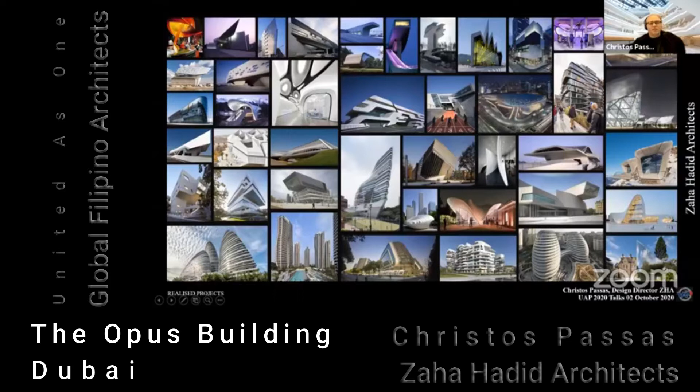As you can see, each one of them is kind of a unique architectural expression. The Business Bay with the creek basically allows all of these buildings to have a good kind of community of buildings around the water. And this is the site of the Opus, in close proximity to the number one landmark in Dubai. Essentially the city of Dubai decided to allow for ample space around the Opus, and that gives it also a certain privileged position within the urban fabric of Dubai.

So when we first started, this relationship between the Burj Khalifa, the extended place, the extended urban fabric of the city, necessitated a project that we thought should be unique. If you look at some of the buildings next to it, they are still characterized by this initial master plan developed for the Business Bay, where each one of the buildings for these lots was meant to have a parking podium on the base, and then have a tower or two towers sitting on that podium.

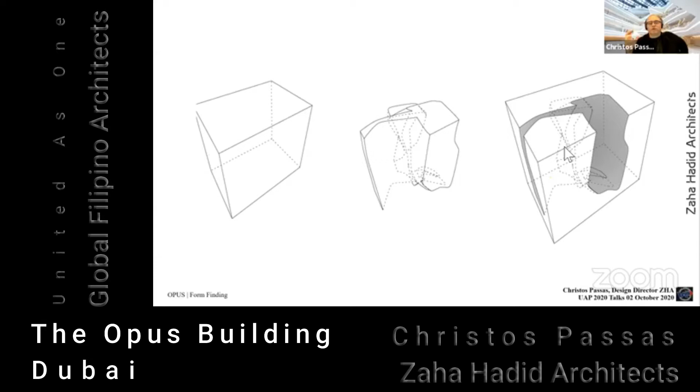What we feel this project does is use its own form to create self-shading, which is important for Dubai. In retrospect, having been with this project for almost 15 years, I see it also as a kind of prototype of three-dimensional urbanism.

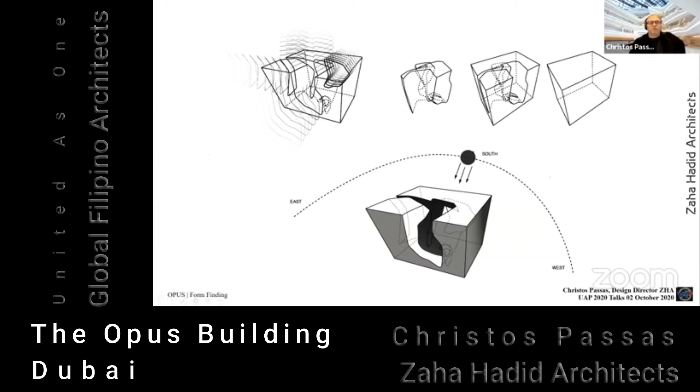This bridge connects the view between the two sides of the building, giving us the opportunity to think of it as a sectional loop that allows movement of people inside, using the building as a continuum instead of a dead-end structure like a tower.

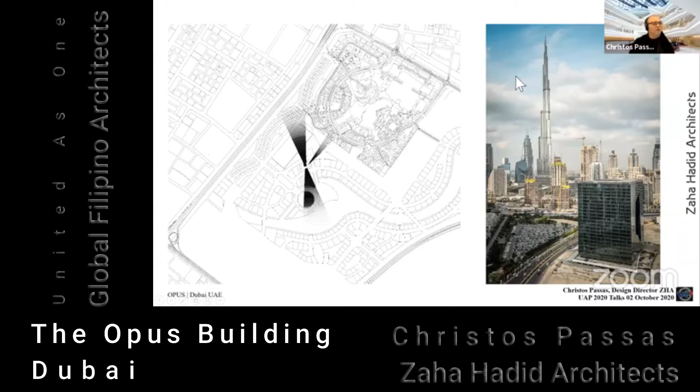The placement of the void allows us to see north and south, through to the desert on the south side and the sea on the north side, and with windows on the side to take in views toward the Burj Khalifa, so we could enjoy spectacular views toward that incredible monument.

Another aspect of the design of the Opus is its facade. Besides the void and solid contrast, which was a very interesting instrument for us to give sculptural form to what is otherwise a simpler volume, there was also the treatment of the facade.

From very early on, we experimented with ideas of facade as effect, but also facade as a veil and a reflective element that would increase the solar insulation of the building from solar radiation, and to an extent enable this building to have a kind of all-glass facade.

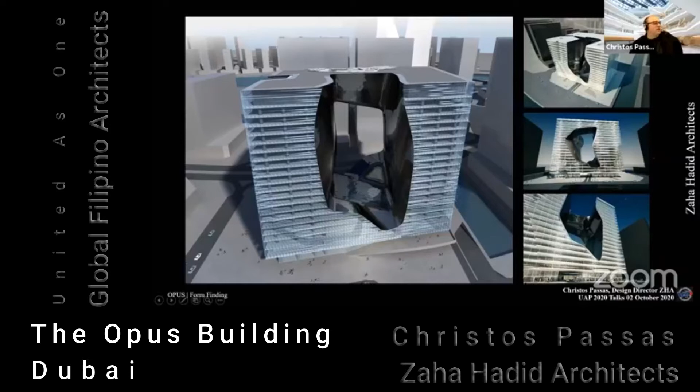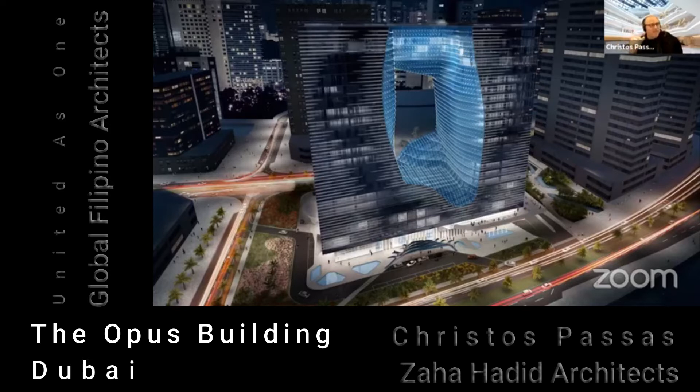This was one of the first almost final views of the project, showing the difference of the volume between day and night, how the void comes alive during nighttime, becoming an element of light and visibility, versus daytime where the volume is much more visible as a solid form.

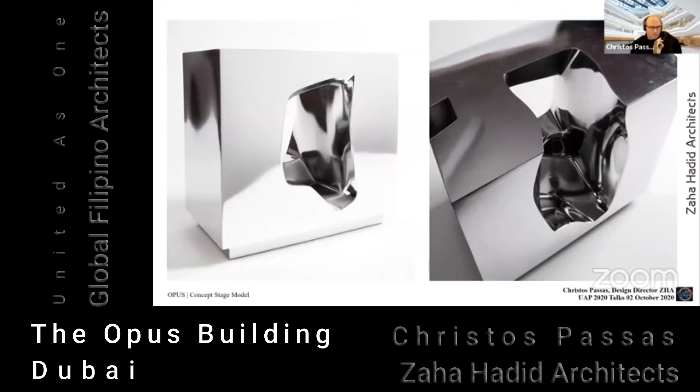I think that relationship between void and solid, day and night, is a theme we've played on quite a lot. Within that, the idea of highly defined geometrical edges holding the project together gives it extra meaningfulness and significance. These are some test models we did once the concept was finished.

They show the cube as a chromed object with a series of self-reflections appearing onto its void, which is also important when we speak about how the facade was developed.

This is another model showing the structure, the floor layout, how the building is internally organized and proposed. We're speaking about a kind of domino system, except at the edges, where the point of incidence with the internal void becomes a point of interest, and all the columns begin to bend, and the slabs take curvilinear form out of the shape of the void.

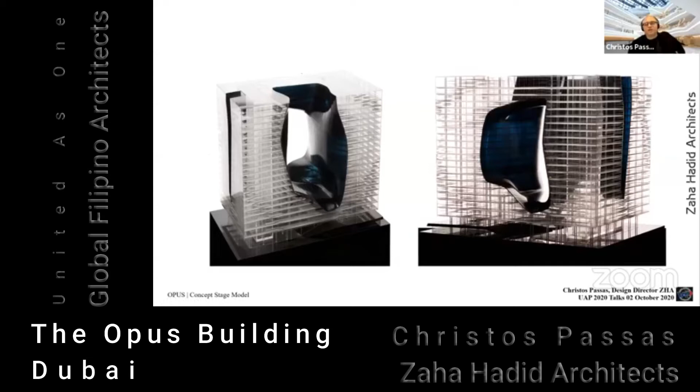That is to say, from an architectural or tectonic point of view, the void is a matter of design, both in rationalizing the facade and the interior spaces, and in thinking about how the whole building is developed.

Originally we started with the Opus as a building with a retail zone on the ground floor, which was important for the client. This is the roofless plan of the two ground levels hosting shops and other public facilities, important because it would reinvigorate the idea of the sidewalk and make the building approachable, rather than unapproachable due to the parking lots in the podium I mentioned earlier.

Above the podium levels, shown here in yellow, are the floors where the offices are developed, and at the very top we had penthouses. Later, during development, the client decided to transform the ground level into a hotel function, which was equally interesting for its public urban space outlook, and transform the penthouses into a series of service apartments at the very top.

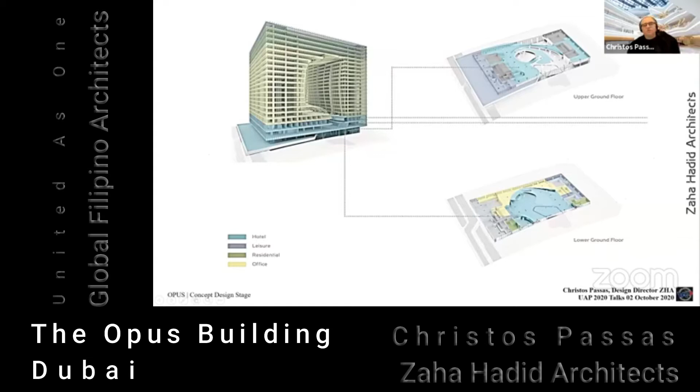So we went through the building volume at that point, and we looked at how this three-dimensional building structure, or this three-dimensional urbanism—the office zones, the hotel zones, the apartment zones—are all becoming one mechanism that allows this building to tick-tock during the day.

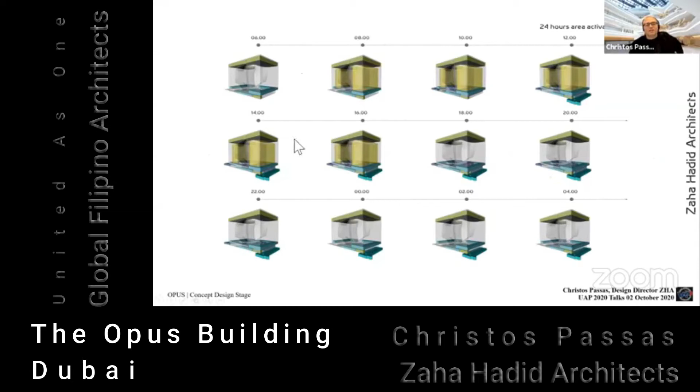Looking at it more carefully—this is an instrument we usually use to understand the buildings we design better—was also how the building functions over a 24-hour cycle. We do this with our master plans, but also with our buildings now, to understand how the flow of people through the building changes, and what areas become more or less active during particular hours of the day.

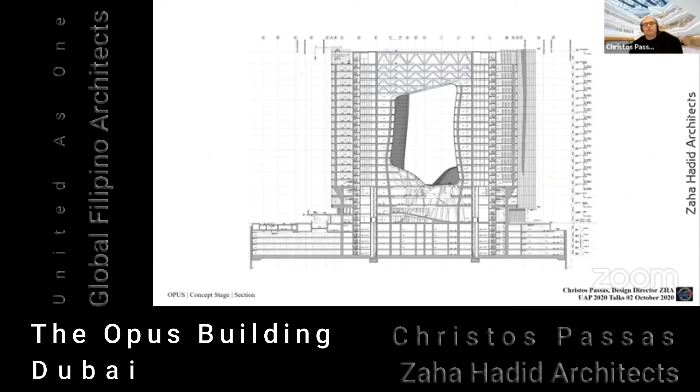The two towers are connected by a bridge. This is a living bridge, meaning it's occupied with apartments, so those apartments have views on either side of the bridge looking up. The overall outlook of this building obviously looks something like this.

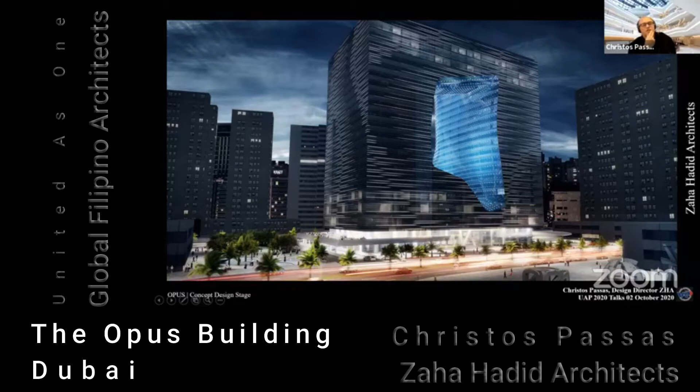The entrances—we've done a lot of designs for this project along its 12-year development, testing different ideas. In this particular case, you can see a very thin metallic mesh structure painted black, almost like a series of palm leaves overarching onto each other, creating shade on the ground for the hotel drop-off area, while being thin enough not to absorb a lot of heat from the sun in Dubai.

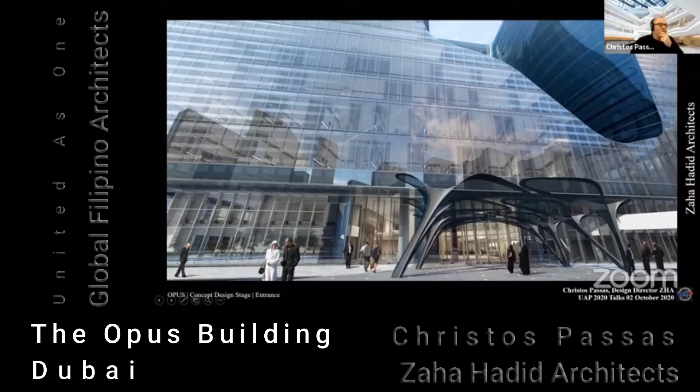So it was also a way to make sure we developed a component that would be easily cooled down and not absorb a lot of heat or energy from the sun. And of course, looking into how entering this building works under this big void, that brings me to the idea of the facade—the fritted facade.

A facade which I almost talk about as if it's a sort of artwork on this building. We first started with very timid drawings of how to proliferate a series of dots and find a way to fade them, so we could create variation and diversity in how the facade could work. But of course, making an artwork on a whole building is not an easy exercise.

There's a lot of logistics—the printing of the facade, especially when we were designing this about a decade ago—and also how to create stencils in a way that allows for a certain amount of repetition in the imprinting of these ceramic reflectors onto the facade.

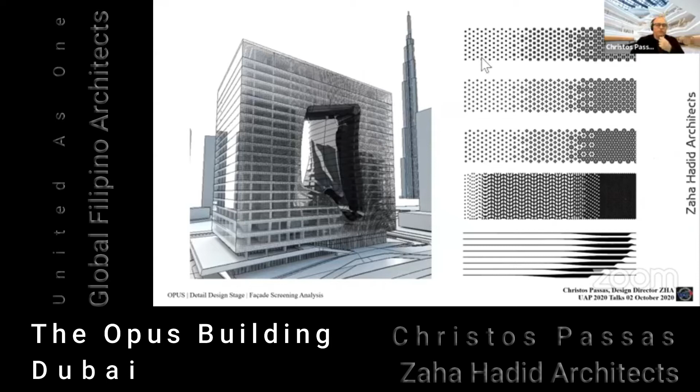Taking you back to the beginning, this was the original drawing we developed. This beautiful drawing, where you see all the lines and movement and interruptions, allowed us to look at the void almost like a kind of black hole that absorbs these lines going into it. So it's a kind of astronomical approach, but it also appears almost like a weather map.

These lines are constantly flowing and moving around, creating a consistency that we later came to call parametric smoothness, while also having points of intensity, points of sudden rupture, and in a way, transition from one side to the other. You can see these lines both for their smoothness and for their transitions.

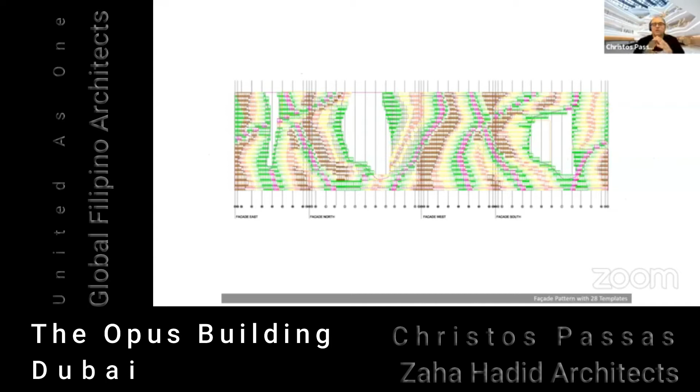And of course, in rationalizing and digitizing this painting of sorts, this artwork, we also came to this conclusion: this is an unfolding of the facade of the four sides of the cube. Remember what I was telling you earlier about the rationalization of those fritting patterns? Well, actually, this is a digital drawing that sits behind, describing every color and the kind of stencil we use to produce this unique artwork. We developed 28 stencils, 28 unique prints that we mixed, matched, and composed onto this facade to develop this effect.

Now, I'm talking a lot about this, and one would ask, why go through all that hassle? There is one important point in the opus one should not overlook. You can see here, this is Fivos and this is Vincent Novak, our project architect when we were designing this building. That image shows a mock-up of the glass when we first went to the factory that was producing the design we wanted, and you can see how you can see both of them onto that glass screen at the same time.

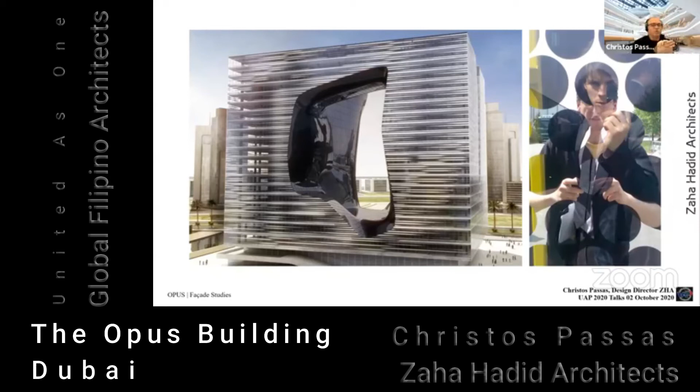What this suggests is that the Opus has a facade that plays the game between reflection and transparency, and it does that at the same time. So the Opus, as you'll see in some later images, has this interesting ability to reflect the surrounding environment, but at the same time allow you to see within it. So it's neither a pure mirror nor a piece of clear glass, it sits in that in-between zone. We found that very fascinating as a scheme, and that's why we proposed it. The client liked it, and I think it does a lot with the building.

One thing it does is it changes every time the sky changes, going from very dark and gloomy to very bright and shiny. So I think it has also that kind of changing character. This is a little bit the technical solution proposed with the different types of stencils. These are all gradients going from 100% solid to 10% solid, and that way we can create lines that have that kind of fading effect onto the building.

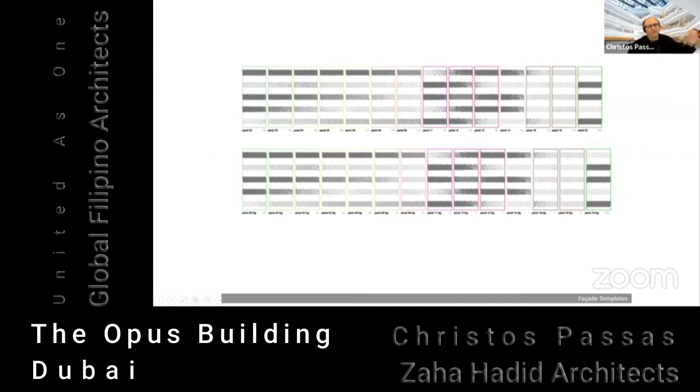Now, digital tools were not always as advanced as we have today, and the thing with digital tools is that they're always advancing. The project we've done previously to the Opus, the Phaeno Science Center, we also couldn't find perfect tools for what we wanted to do. So every project for us is a bit of an intense point of intention and tension with what's available in terms of software. But what we wanted to do here was to take the volume of the surface of the void and begin to rationalize it into a feasible, constructible, buildable proposition.

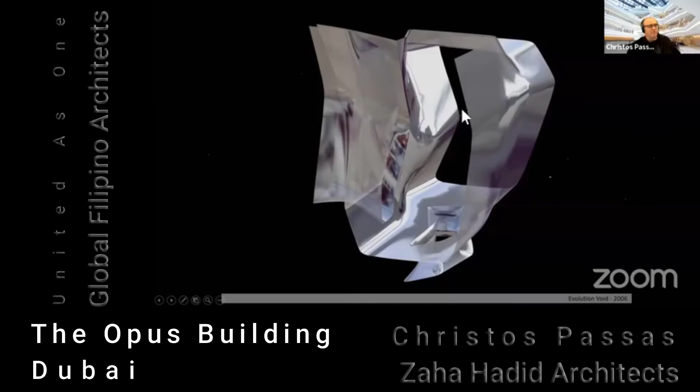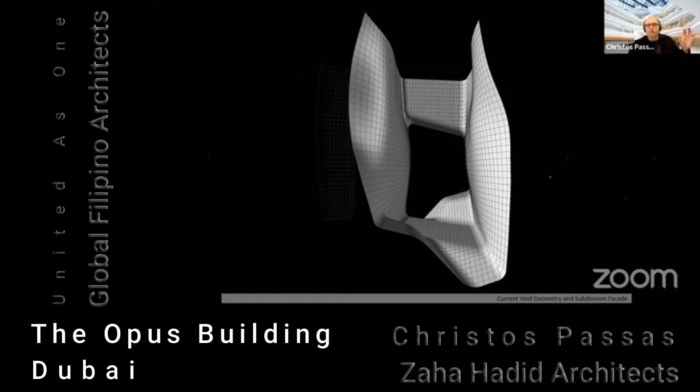These first silver drawings allow us to see two things. First, it gives us more clarity on how the surface bends, but at the same time, it gives us an opportunity to see how the reflections on this surface begin to play out, so we can have smooth reflections throughout the project. You can look at the drawing like this, the rationalized version of that void, and see the strict rationality and geometrical discipline that goes into developing an object like this. But at the same time, this will not show you the reflections, so we had to design and review both of those elements in making this facade what it is.

Speaking about the surface analysis first, we used a lot of analytical tools to create a kind of system for achieving material economy and reducing the complexity of this project. Where you see red lines, red panels, red surfaces here, this is where the panels are completely flat. The blue panels are singly curved, and the green ones, it changes, but essentially the green is where we may have double curvature in the building.

Because this is a free form, we wanted to make the statistics in such a way that the doubly curved glasses are limited to the absolute minimum, and I think we managed to get it down to 10 or 12%. We had about 20% single curved pieces that are a lot less expensive to make, and the other 65% of the facade glass was all flat glass.

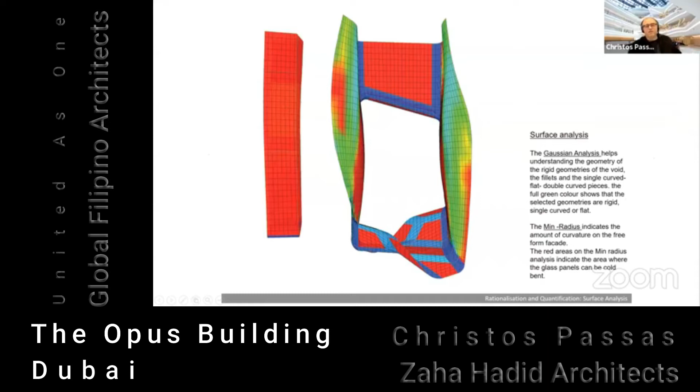This made it feasible for the client to approve it and say yes. So we went through a few cycles of these. We did the so-called Gaussian analysis so that we could test which regions needed to be designed how.

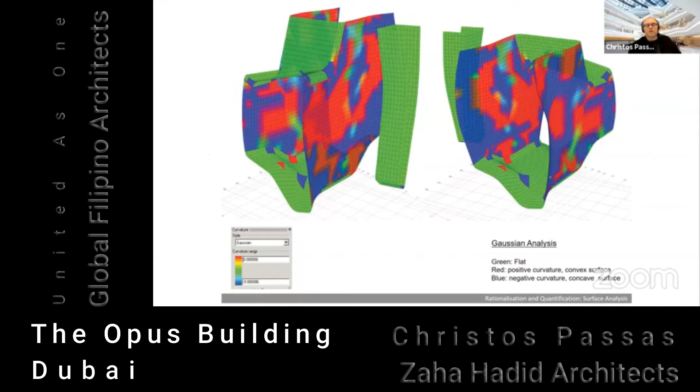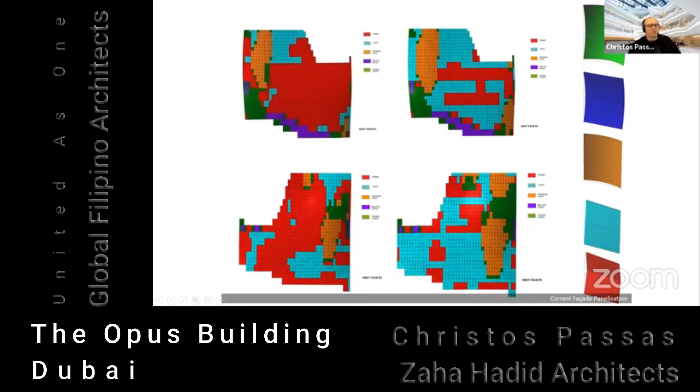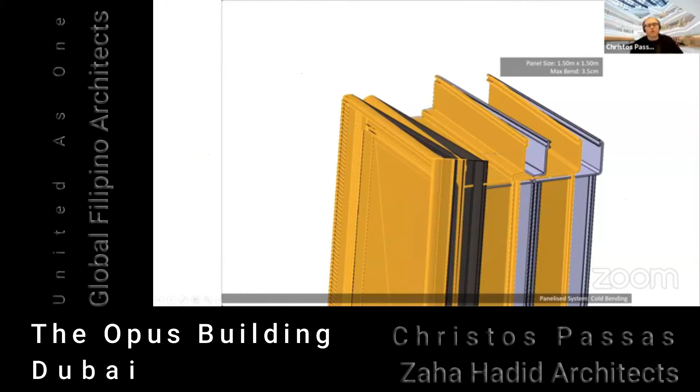But also, quite importantly, we looked at ways to facet the glass so we could get further economy without necessarily compromising the reflectivity of the facade. This is one of the ways we thought about panel size and maximum bends. Cold bending was one of the techniques we used, and it's now widely employed by contractors and architects in many buildings.

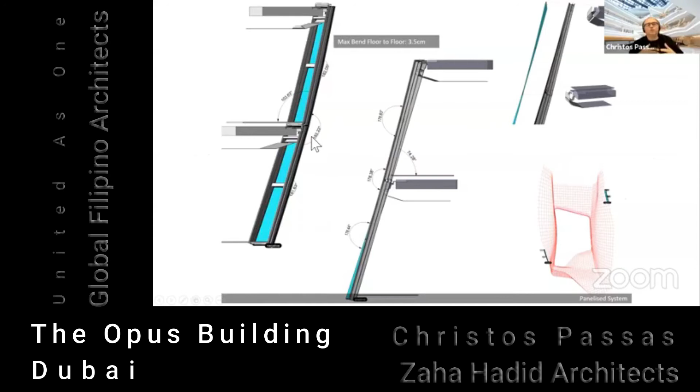But we also did another thing. In order to deal successfully with the reflection this building would produce, we did a large number of photorealistic analyses. The photorealistic analysis let us test, when we have two pieces of glass that are flat, or flat and cold bent, meaning warped, what would be the maximum angle we could break the two pieces of glass so we'd still get visually smooth reflection. The numbers shown here are the outcome of that condition, suggesting that if we break the glass up to 2 to 2.5 degrees, we'd get an overall smoothness to the object that would be almost imperceptible to the human eye. That gave us a lot of additional feasibility in the overall object.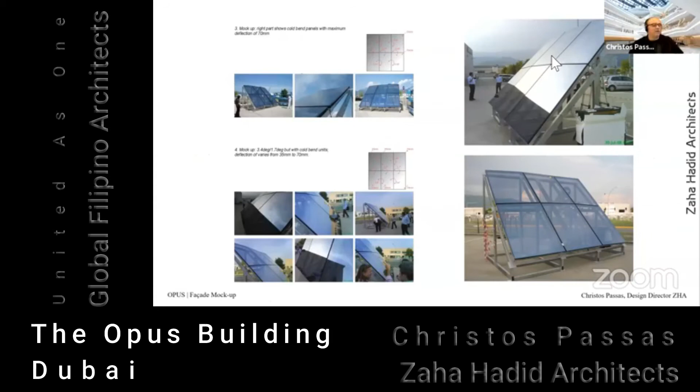Later on, when the design was almost finished, we started testing these, and in these examples, especially the two images on the right-hand side, you can see how the reflectivity of the glass plays an interesting game in shade and shadow in terms of how it reflects and becomes transparent. At the same time, the faceting of the glass comes together to create something faceted, but in the bigger view of things, becomes actually very nicely smooth. It's quite nice the way that's been done, isn't it?

So this was a lot to do with this facade story, and a lot of our time went into developing these features of the facade.

Taking you back a little bit, I wanted to speak about the concrete work as well. This is the building after the basement was finished, so here we are almost nearly at ground level. All the basement levels have been built. The building has two cores that were lifted up with moving formwork as the construction went through.

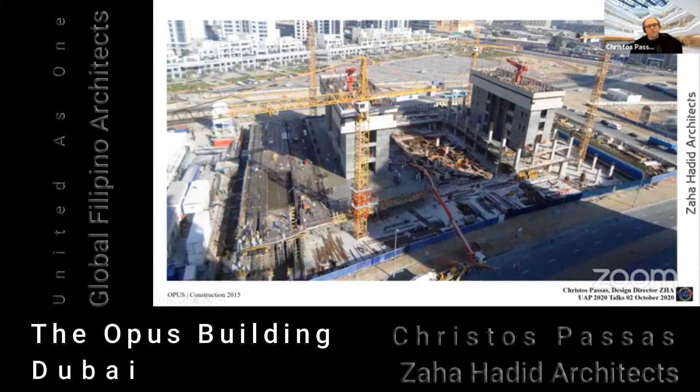Here you can see how the building looked under construction. You can recognize these V-shaped transfer zones where the external columns of the building shift and turn into the inner waist of the building, allowing the cube form to float over the ground. You can also see how the columns bend and adapt to the flexing of that facade, and how these two towers essentially came together to create that one whole that we know today as the Opus.

This is a photograph during the installation of the facade, and it makes the point of how the building reflects and makes transparent the environment that it sits in. This effect is essentially a zero-thickness effect that reflects and allows light to go through.

You can see here one more feature of the building, where all the columns were set back two meters inside the office spaces, so that the facade remains uninterrupted from bay to bay to bay. That also allowed us to optimize the visual lines from inside the building toward the outside, so whether you have cubicle offices with subdivisions or open plan offices, this architectural approach gives you much better visibility toward the outside.

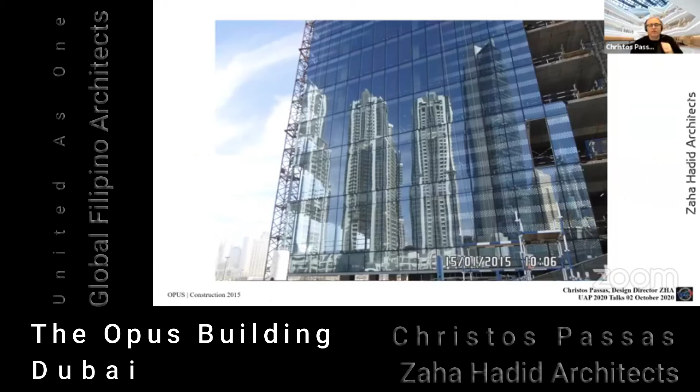Moving on, I spoke about the atrium a little bit earlier, and of course the roof of the atrium is something that also underwent quite a significant number of iterations and development.

In this case, you're seeing the trellis, the steel trellis that is basically holding this roof up. And although in Dubai it only rains once a year, if that, we still had to design a roof that would be able to deal with gushing water whenever that happens.

At the same time, one of our other concerns was that when building this trellis, we wanted to allow for maximum visibility from inside the space to the outside. So instead of making all the elements of these deformed grids into equal uniform members, we created primary and secondary members so we could increase the support span to 9 by 9 meters, and then have 9 pieces of glass with thinner profiles within it, so we have a much thinner structure and visibility through.

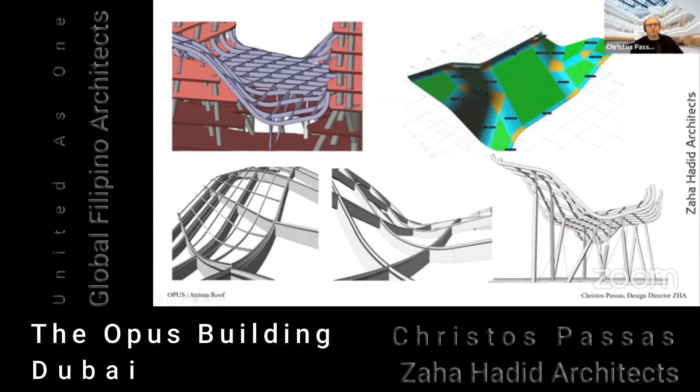Of course, a lot of digital design and fabrication went into the making of this project. Here you see images during the construction of this roof, with workers showing the size of these elements and what kind of mega structural piece of work it was to put this together.

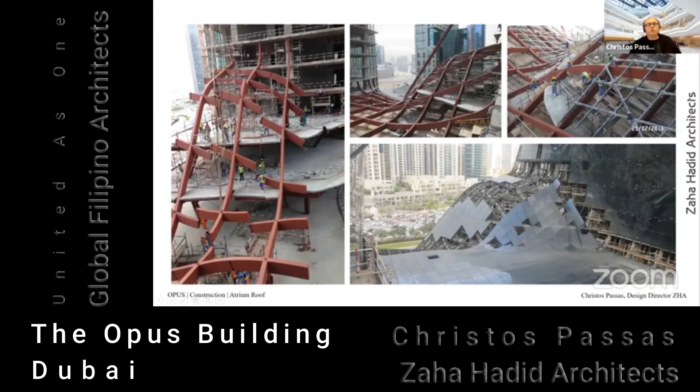But also cladding it, which was the other effect of what I spoke about, making sure we maintain maximum transparency through what is essentially the space that sits underneath this big void, which is the atrium, where during the development of the hotel we designed these balconies.

The client and operator, Meliá Hotels, is one of the most wonderful hotel brands in the world, because their hotels are always very exciting and semi-casual, and you feel free when you go to them. They have a very nice feel to them.

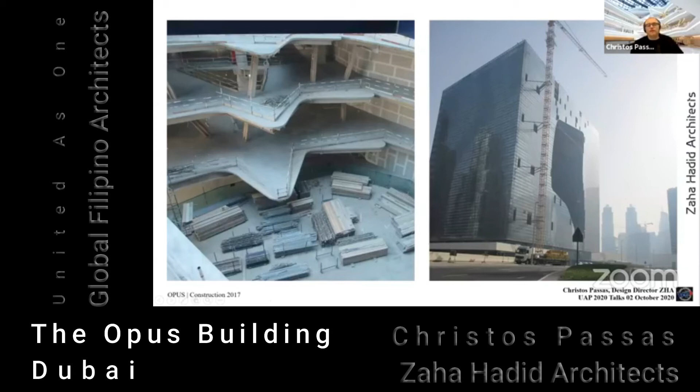So what we wanted to do for them was develop a set of balconies that would allow people to sit on these edges and overlook this big atrium space inside. And this is what the end result looks like.

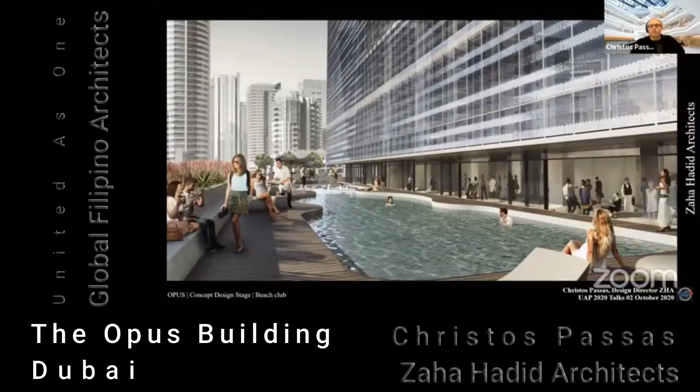Something more about the facade, but also the swimming pool of the Opus, which goes hand in hand with the hotel, of course. The corridors to the room - we go from a very wide, bright, airy and lofty space into a series of corridors that are much more dim in terms of light, with beautiful wood veneer on the walls, and bronze and pink champagne gold trimmings on the surfaces as you go into the room.

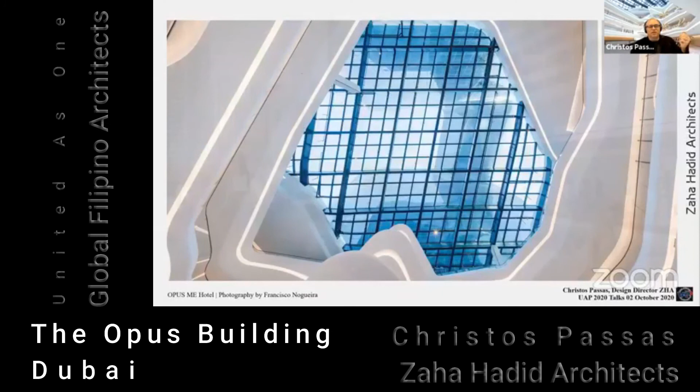And the logic here, of course, was to create a sense of hardness to softness. So it's again about that transition from one opposite to the other, where the guest moves from this kind of space, which is much more airy, wide and marble-like, into this kind of space, which is much softer, with carpet on the floor and wood veneer and so on.

So the section of the atrium in this case, so you can see the white floor overlooking into the main atrium. These decks become the reception area. Then you have a cafe, then a patisserie, and then a space for events all the way at the top, where you can also play music and invite the DJ who can stand on that balcony.

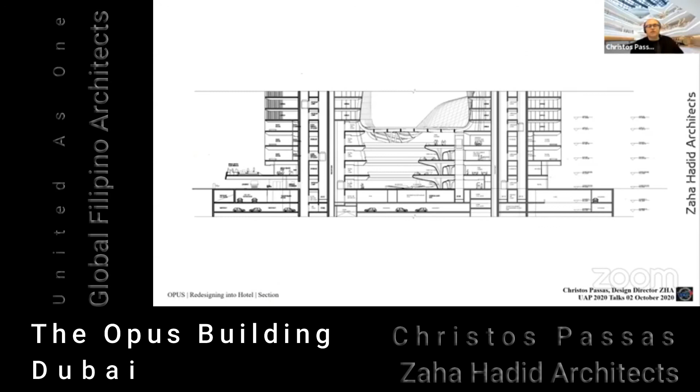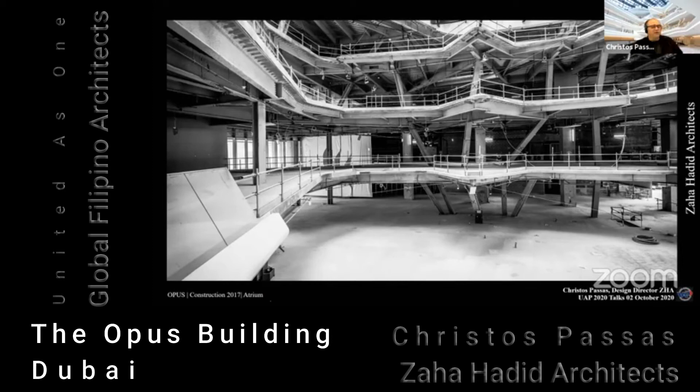So there's a series of projections into the space that allows the hotelier to use them in different ways that they may want. One of the more practical, constructive views of this space shows how it looked during construction, with a myriad of steel elements coming together to make the possibility to develop something like this.

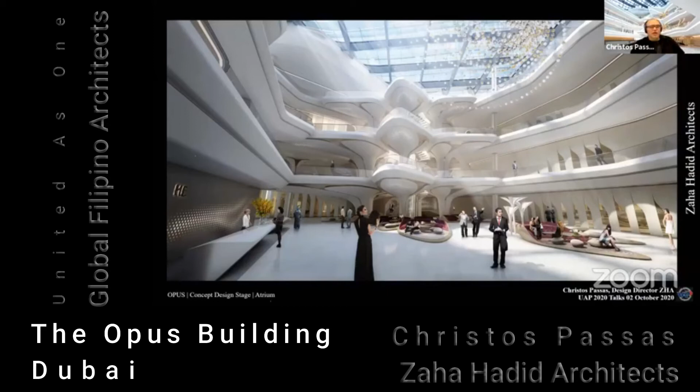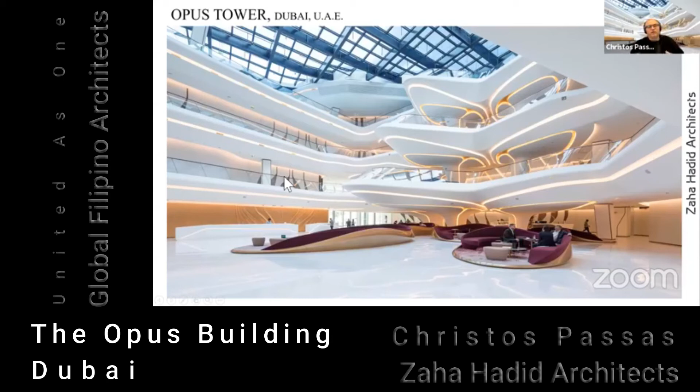This is one of our renderings. This is what we had originally proposed, and you can see here how it was developed and executed in a very nice way. You may also notice behind these white walls a series of treatments on the facade. These are bronze pieces of glass basically showing the entrances into what is essentially the restaurants, the club, and the patisserie areas of the hotel.

So the hotel lobby is basically the space that connects the two sides of the Opus. These are two main streets on the top and bottom of the site plan. Basically this lobby becomes almost like a flask that brings us in—somebody is writing on the screen—can you see my mouse when I'm pointing at this, Christian? Is that visible? Yes, it is.

Okay, so the two drop-off points—we're coming in through the reception desk, placed against the wall here. The Arabesque Lounge is in the middle; these are the columns, the footprint of the columns into the space. The lifts lead up to the hotel, then exit on this other side. The spaces adjacent to these are outlets. So essentially we have a number of outlets, for steakhouses and cocktail bars, a very nice Italian restaurant, etc., occupying the spaces, accessible both from the outside and from the inside of the space itself.

So all of these levels—in these photographs the hotel is of course empty for the photography, but you can imagine this place full of guests, and how those columns begin to define the space.

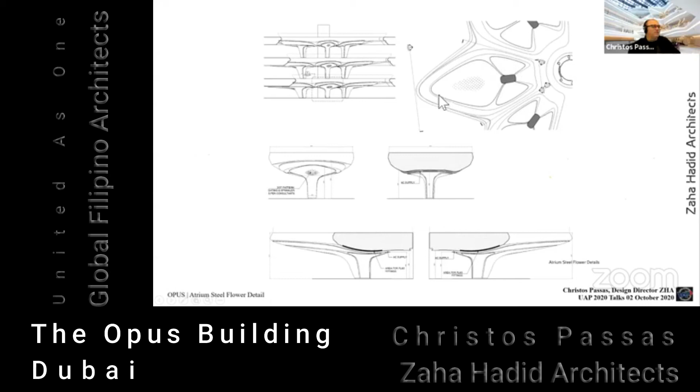I think this is also one of the aspects I wanted to speak about. We developed this design as a way to give a little bit of hue and definition in the whiteness of the form. Each one of these shadow gaps you see here essentially becomes part of the lighting lines installed in the building, and how they light up the whole building. These were developed with white LEDs, but inside each one of those coves there is hand-painted pink gold highlight, so it can treat the color and make it a little more yellowish. This is also quite visible here.

You can see this is the all-day dining opening out into the terrace and underneath the atrium. So the space we've been discussing can be used both for hotel activities—movement of people, restaurants, people sitting, dining, or speaking to each other, etc.

But at the same time, this space also forms quite a beautiful gallery that can become a cultural space. I think one of the ambitions of Mr. Amjad is to turn this into a cultural space and invite artists to make installations inside here, creating an ongoing program of events that will always give character to this space.

And of course, within it, part of the exercise we had done to reinforce this approach was to design a series of these bespoke elements. In this case, these are called the Petalinas. They're essentially sofas, but the whole furniture fit-out of the Opus is developed on the basis of these aquatic life forms, whether they are like Petalinas, or these kind of sea flowers here, all coming together into one ecosystem.

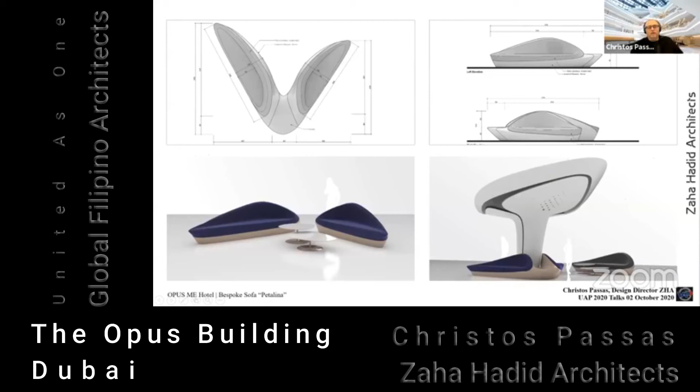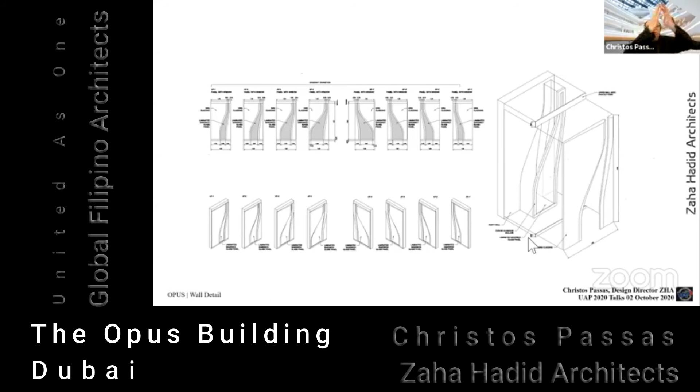On the other hand, these are the designs, the technical designs for the doors that give us orientation toward the restaurants. And of course you will see, and possibly recognize, the pointy arches. Each one of these is creating a kind of dome structure that signifies the entrances into those spaces.

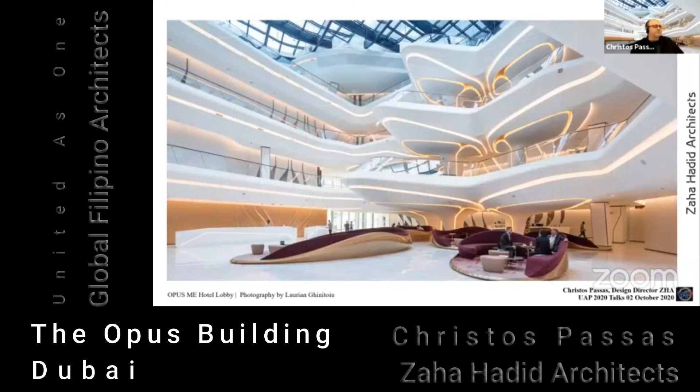So the hotel, and from here you can also see the Arabesque Lounge, where we've developed these carpeted pods where one can take their shoes off when going up on the pod and sit down. We created these as places where companies of people, groups of friends coming together to sit, or for a little informal meeting, or if you're expecting to receive someone, can have their own little pod, their own little territory, to enable people to come together rather than these big blank endless hotel lounges.

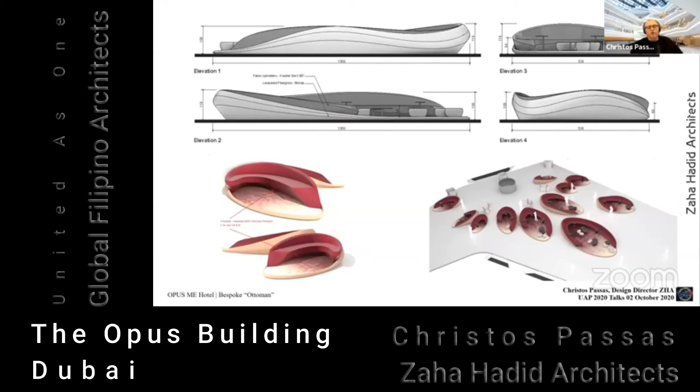So we want to create a spirit of intimacy here, so warmer colors. We wanted the staff to be easily visible and accessible, but at the same time not intimidating.

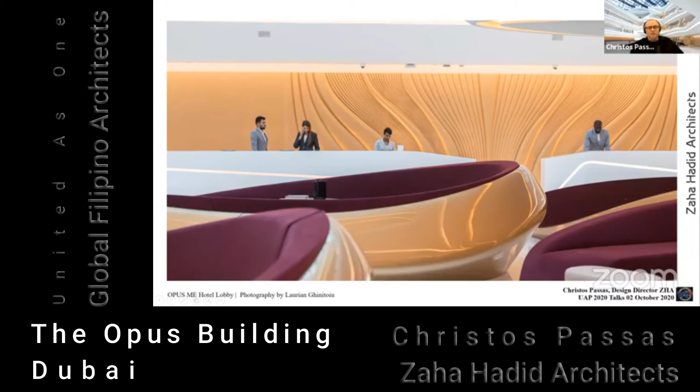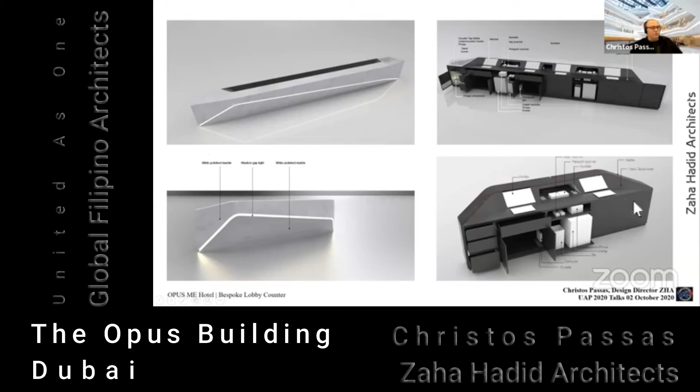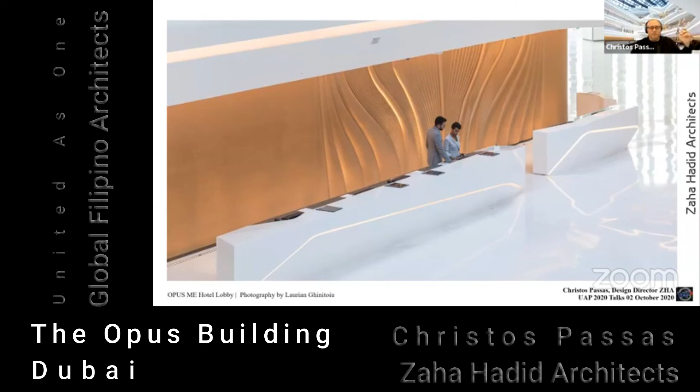We've designed the reception desks with marble, with integrated lighting inside, and integration of computer screens, touch screens and so on. We went to this extent to develop something this clean. So there's a lot of work, from highly conceptual to very detailed and articulating work, to make sure the result is nice, clean and simplified.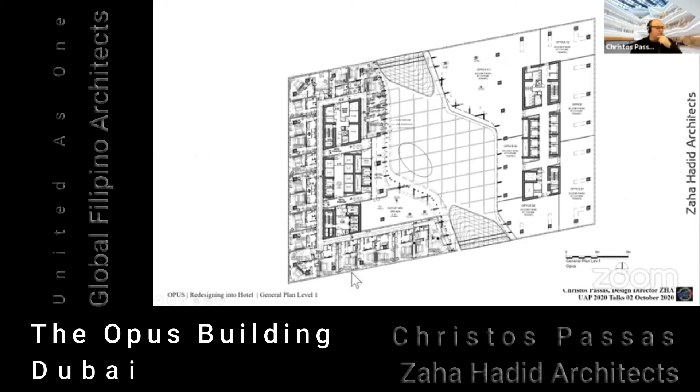Then we have suites, junior suites in the corners of the building. These designs were developed taking into account the hotel operator's brief: smaller standard rooms called auras and the vibe rooms, which are slightly larger standard rooms, and then the junior suites at the corners.

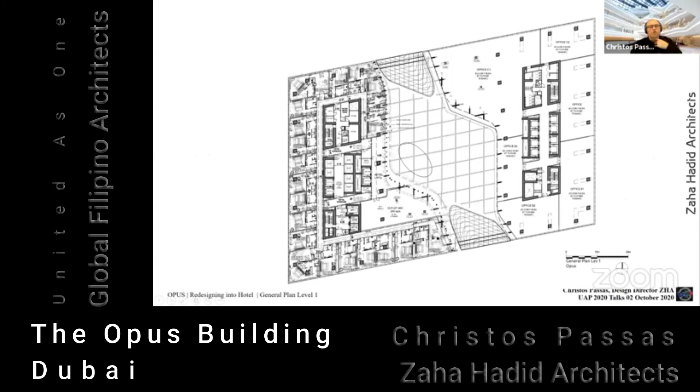So this is the vibe room, I believe, which is basically the largest of the standard rooms. Here the take we had was that we wanted to give a big, luxurious bathroom to each of these standard units. We had the so-called maxi bar and the bed that we designed. We also designed the sofa bed for the rooms, but it was later removed to allow more space in the bedroom itself.

We also developed two types of bathrooms: one in black marble, the other in white marble. We also took the initiative to contact one of our trusted suppliers, Porcelanosa, and developed together with them this bathroom range, one of our first complete series of products, where we developed the bathroom, the wash basins, the shower, the bidet, and the toilet all as one set of objects. The Opus features this product line as our first project on the market.

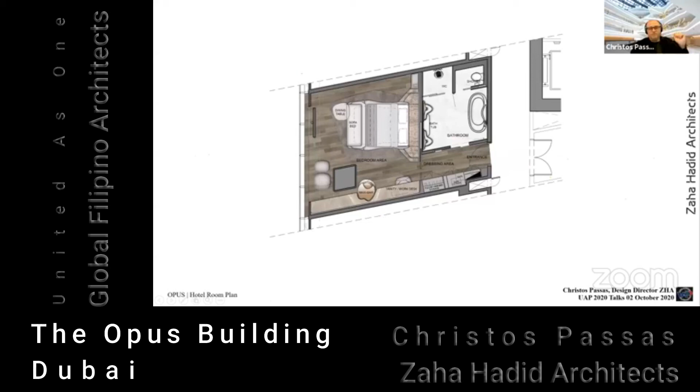So the design of the rooms is something we've taken a lot of consideration in, and we looked into different ways to organize them so they're simple and clean. We've designed the bed and also the backboard behind it, finely textured wallpaper on the wall, and marble slabs on the counters sitting over walnut effect cabinetry. The rooms were developed in two conditions.

One was the midnight desert, where we chose blue tones almost close to black, and also slightly beige tones to show the locale.

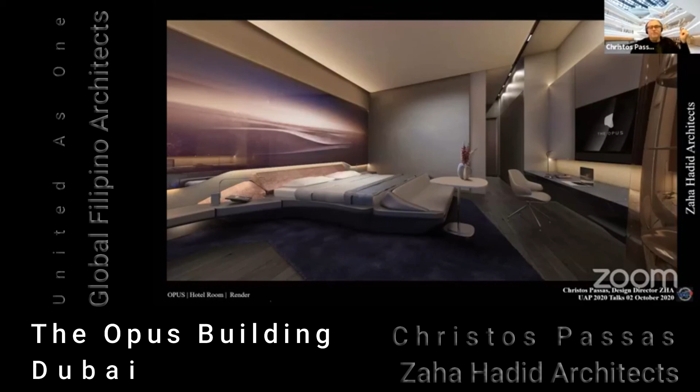And in this case, this is the other version of the apartments, the hotel rooms. This one is called a desert themed room, which deals with a different set of colors, but is also a suite. The bathroom here is in a much larger space, obviously, and the bed opens out through the corner, overlooking Dubai and the area of Business Bay.

But we also designed these work and play pieces of furniture, to create a unique piece of furniture for both work, meaning the desk adapted to this particular room and place, and play, sofas where you could sit, relax and recreate during your stay in this hotel.

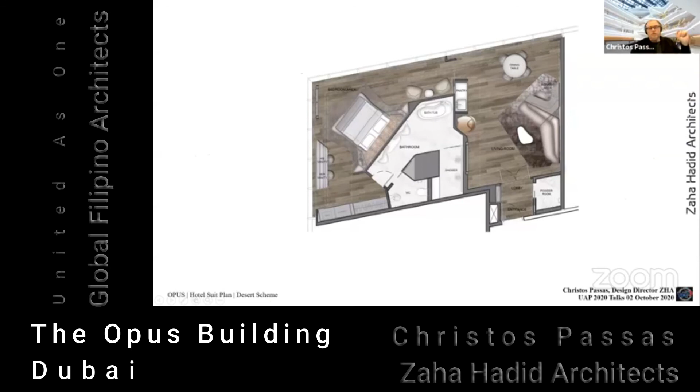And this is the other type of room, using the same bed with slightly different colors, a different graphic on the wall, and a slightly lighter palette.

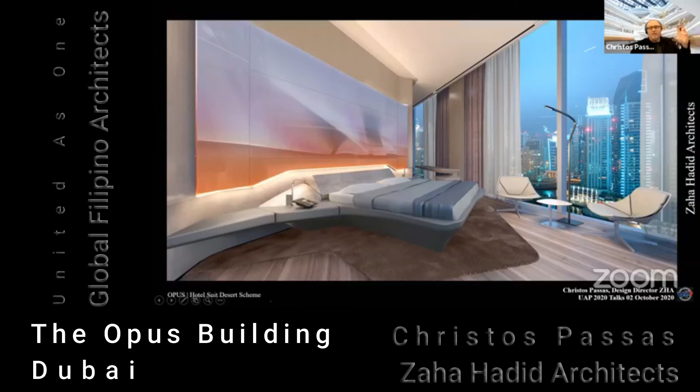And this is the end result and what it looks like. The bed, which was always of primary importance to the design—and for the hotelier especially is the number one feature of every hotel room—so we paid particular attention to that, integrating a lot of technology inside the frame of the bed.

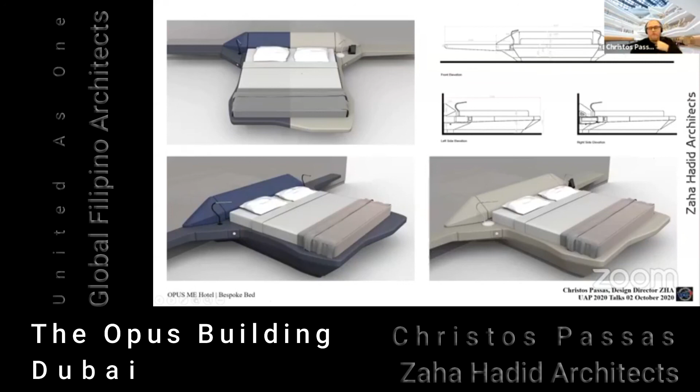We allowed for a backrest which, instead of being vertical, is placed on an incline, so you can rest back on the bed, or pull it up a little to make it more vertical for back support. Here you can see the two different colors, the darker blue and the lighter beige, for the different types of bedrooms.

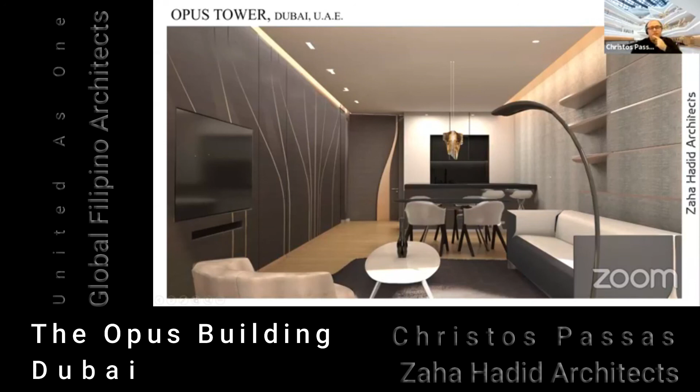So, simple spaces, but with nicely finished, nicely selected furnitures and bespoke designs inside. And this is another version of the room.

And another one of the types of rooms here, with all the walnut veneers on the walls, allowing glass subdivisions between the living room and the bedroom, to allow for more transparency and light coming in through the facade, the bathroom in the back, and the walk-in closet on the side here.

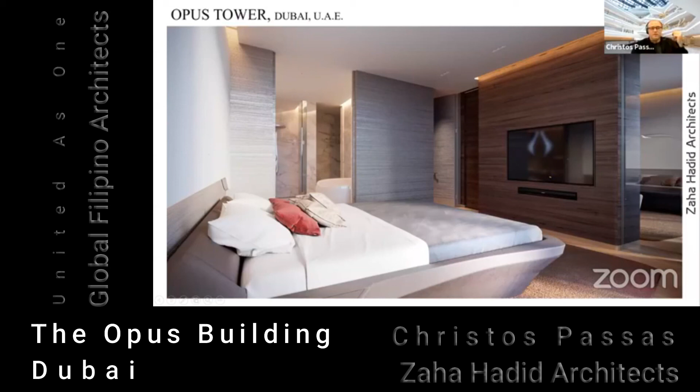So, talking about bathrooms, this is the Opus bathrooms with the mirrors designed. These are all Vitae range by Porcelanosa products, designed by ZHA, to have these elongated wash basins that appear like corals, and a nickel-chromed tap at the top activated with a sensor, a bathtub that looks like an oyster shell, featuring an overflow to fill the bathtub.

On the right hand side is the shower with a fixed shower head, but it creates a kind of rain effect, and a really simplified design with book-matching pieces of marble, so that we can have a very simple and fine experience.

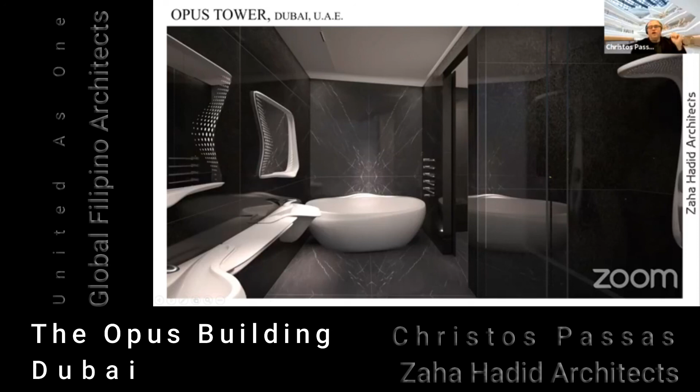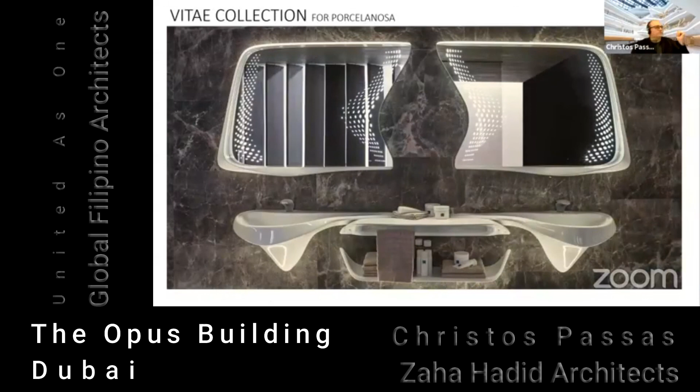So from the rendering to the actual result, here you can see the design and the mirrors, and how the whole thing comes together in a hotel setup, with the cosmetics in place, and the reflection on the marble was also quite important. And this is the set, and that's the final result.

And in a nutshell, I think this brings us to a close. This is the Opus, inside and out, looking at itself and looking at the environment. As I said in the beginning, we're very proud to have accomplished this project, and it's been a labor of love for a number of years.

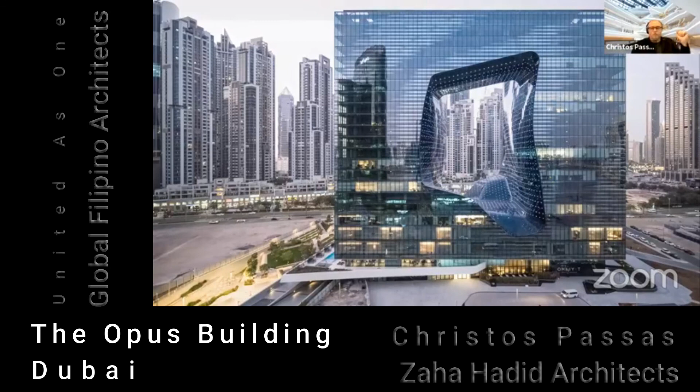But I think the results are due to Zaha, of course, but also to Patrick Schumacher and all the people from 100 or so who worked on this project over the years. Both HPA, who worked with us on the interior design, the local architects, BSBG, BG&E, who were the structural engineers, Agnes Koltay and Koltay Facades, who has been with this project since the beginning, and also the contractor Brookfield Multiplex, who's done a great job on this project, and of course the hotel operator Melia, who are very forward-looking people, and they know the hotel business very well.

And I could say that I think it's a good match, a very good match for the Opus, and a blessing to have them run this hotel over the next years. And here I would like to leave you with this photograph.

We've been looking at the Opus as an object all this time, but it does sit in the city. It is, in a way, a contextual project. It's not a simple contextualism, it's a much more complex contextualism, but it sits nicely within the space, I think, and it also alludes to a new kind of urbanism, a new way of thinking about buildings, a new way of thinking about the building as an inventory of the city, not only within its realm as a real estate property, but something more than that.